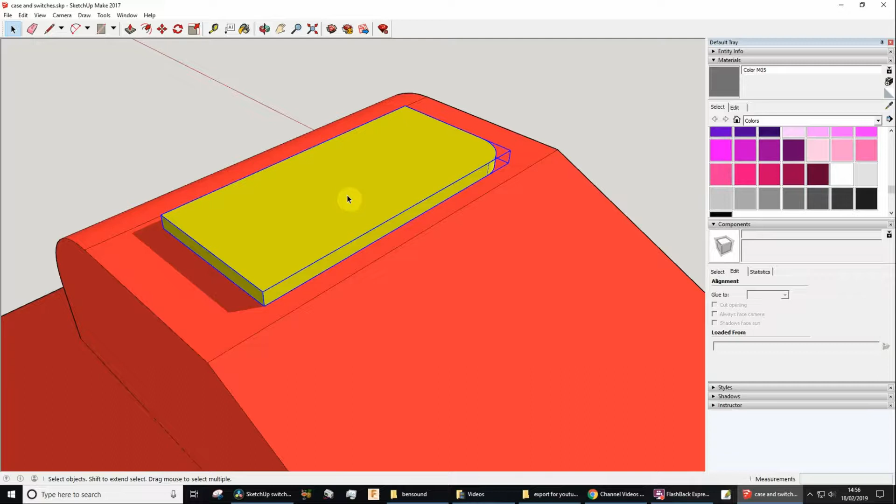Now let's just check, so we've got a selection tool, and that is grouped. You can see that's grouped because when I click on it once, it's got all this blue going on around it, so it's not ungrouped. That's good because then when I draw on top of it, the things I draw on top are not going to get stuck onto it and cause a problem when removing them.

So let's draw using the rectangle tool a shape for the switch. Now I've just jotted down some numbers, and the external bezel for the switch measures 21mm, so I'm just going to type 21, comma. If you notice the bottom right hand corner of the screen, it shows you these dimensions as they're being typed in, so 21mm, comma, and then 15mm. Now I press enter, and there we are.

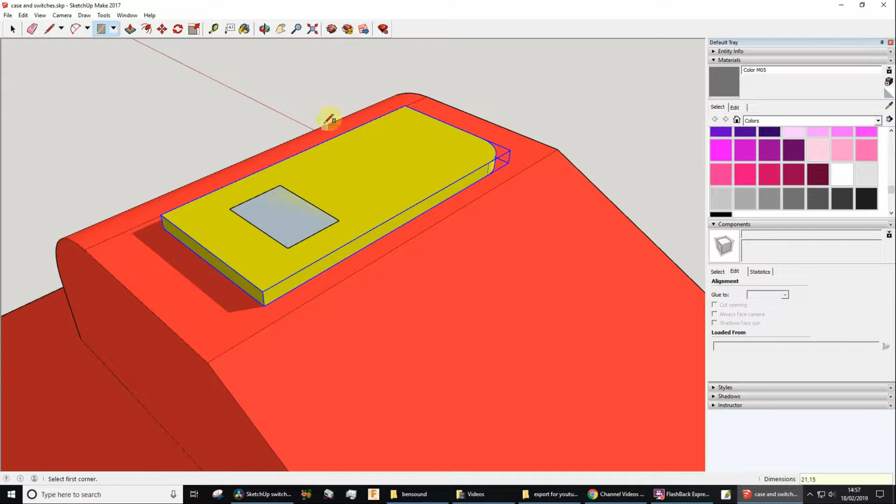And then I'm going to use the push pull tool, so I press P, and then I can lift this up. Now remember, this is the outer bezel of the switch, which I think is something like about 2mm high, so I press 2, press enter.

So that looks reasonable, let's zoom in a little bit more now. As I say, that's the outer bezel of the switch, so there's like the inner part, which is the bit that pushes through. That is inset by about 2.5mm all the way around.

It's fairly even, so let's use the offset tool here. What I need to do is just click that face, I think. Now choose the offset tool, and then I can pull in - I will be able to in a moment. There we go, I can pull in like that, but you need to pull in by about 2.5mm. It doesn't need to be totally accurate.

Don't get overwhelmed by the need for accuracy, it's supposed to be a realistic sort of looking drawing, it doesn't have to be absolutely accurately dimensioned. So let's pull in, and then I will type 2.5mm, just 2.5, press enter, and then it's inset that about 2.5mm. So that looks good.

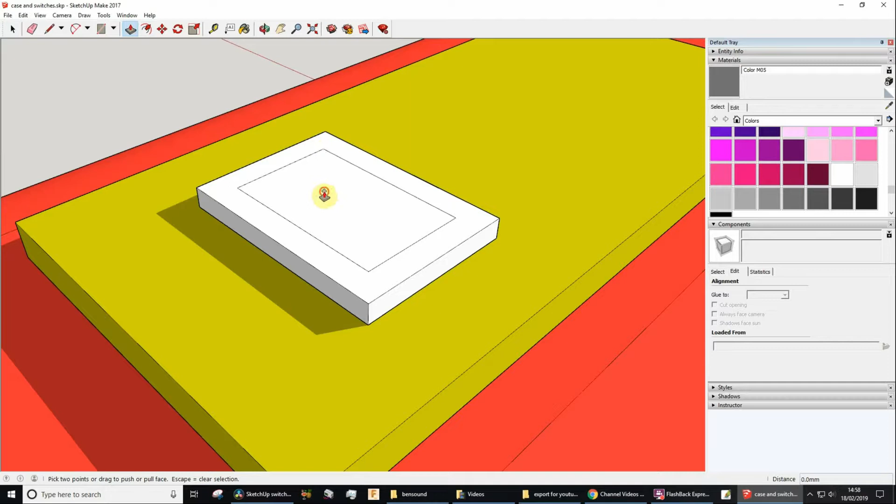And then I press P for the push pull tool. Then I can - oh hang on, let's just undo that - and then I pull that up like so. How much is that up? I haven't measured it, but I would estimate, just looking at the switch, it's about 3mm. So 3, and then press enter, and I think that looks quite reasonable now actually.

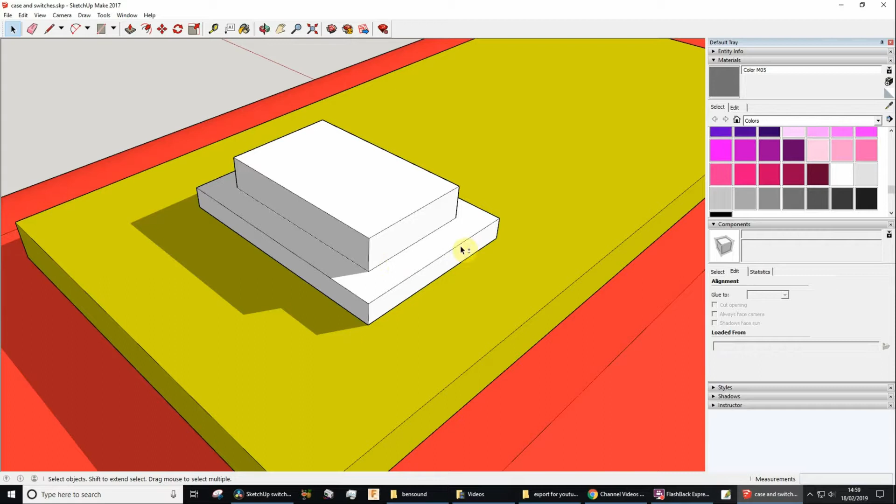So let's just zoom out a little bit, have a look around. So it doesn't look a bad representation of the switch.

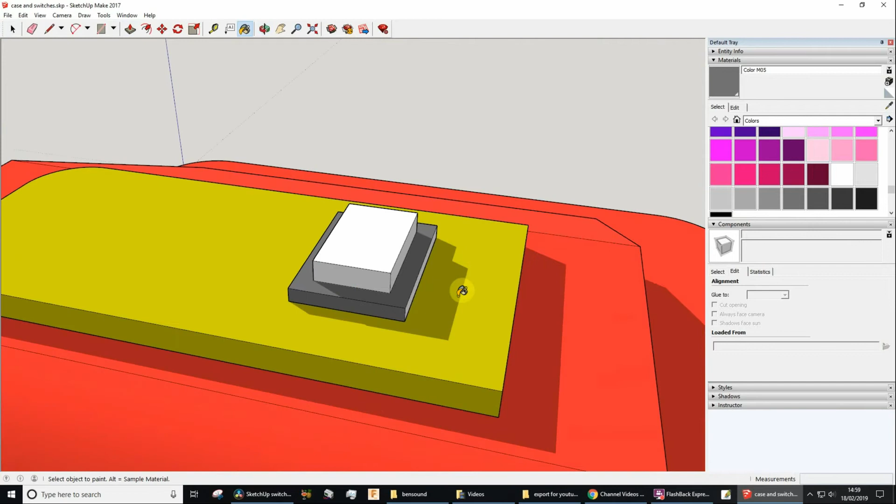Now many of you have used a white button with a grey surround, so let's do that. And as soon as it's got colour, it actually starts to look much more realistic. Having the shading on is a good thing as well. I think if you go onto view, shadows - not shading, shadows - if you enable that... if you add shadows, then for minimal effort it just looks much better. So it actually doesn't look too bad at all, does it?

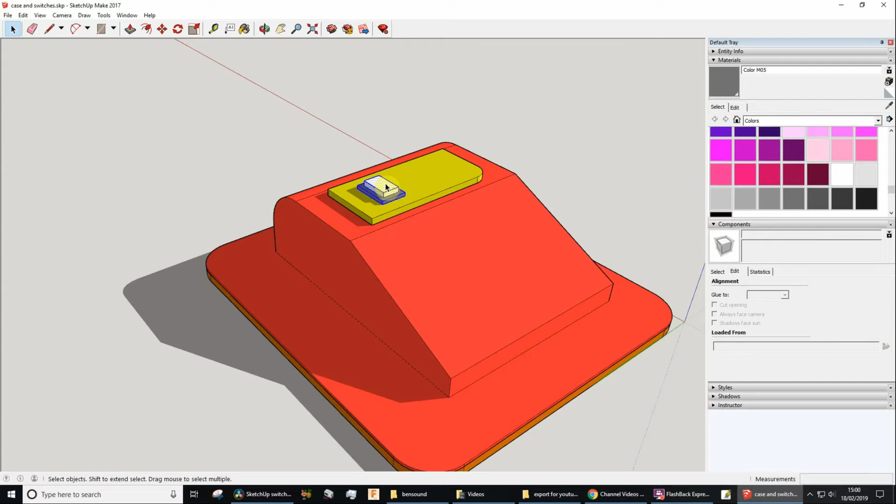Now if I press the space bar, that gives me the selection tool, that one up there, the black arrow. If I just triple click that, now that selects all of those things, but not what I drew it on top of, because remember that was grouped separately. And what I'm going to do now is right click and make that into a component, because that sort of makes sense to me to have that as a component. So I will define this as white PTM, push to make switch. Don't have to do this, but let's just say it's going to glue to horizontal surface and click create.

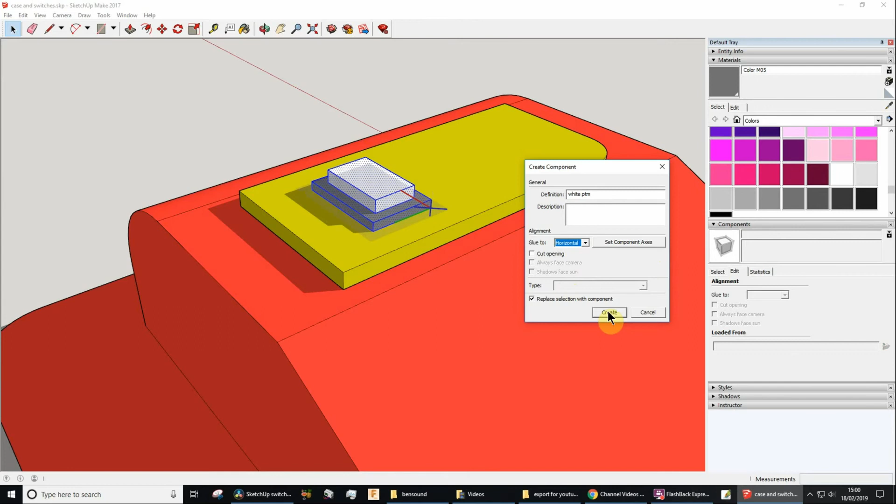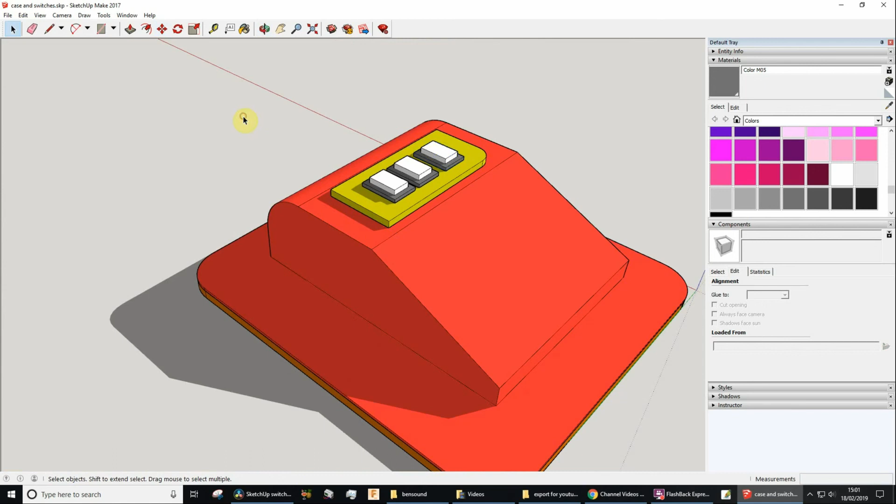And then if I press M for the move tool, and then I press control and drag along here, then you can see that I can have lots of things like that. So yeah, for minimal effort there, I think that is pretty minimal, and you can actually get some quite decent looking, fairly realistic looking switches.